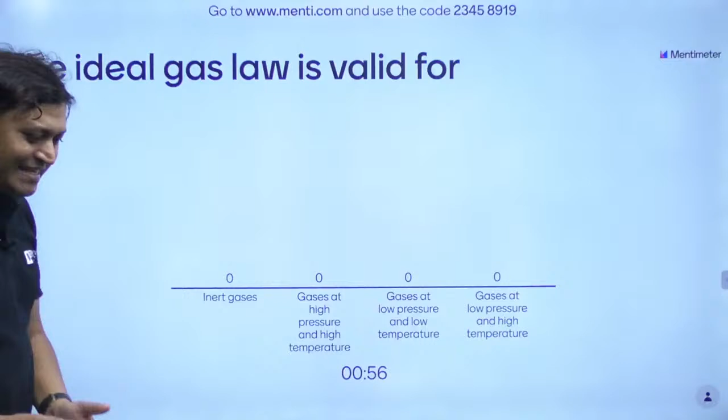60 seconds I had given you. The ideal gas law is valid for, there are 4 options on the screen below. Option A, inert gases. Option B, gases at high pressure and high temperature. Gases at low pressure and low temperature. And gases at low pressure and high temperature. Yes, quickly, 30 seconds you are having.

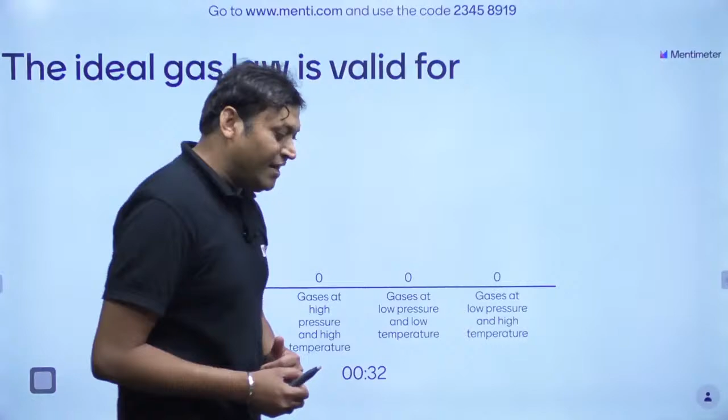It is going to be a very important as well as very interesting session for all of you. So please take part in the session. Yes.

20 more seconds to go. The ideal gas law is valid for. Your time is about to end. Time is up. So let us see how many of you have participated and how many of you have given the correct answer.

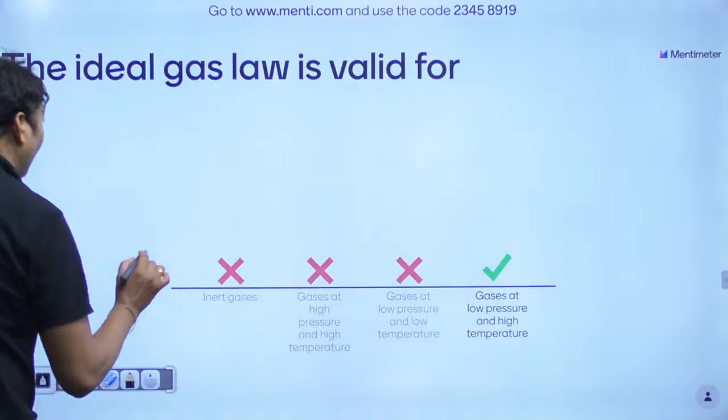The first question, the ideal gas law. If we talk about the ideal gas law, what is the ideal gas law? Ideal gas law is PV is equal to nRT. That is the ideal gas equation. PV is equal to nRT is the ideal gas equation. And this equation is valid for the gases where the molecular size and intermolecular forces of attraction become insignificant. That is at low density. The gases at low density behave as an ideal gas.

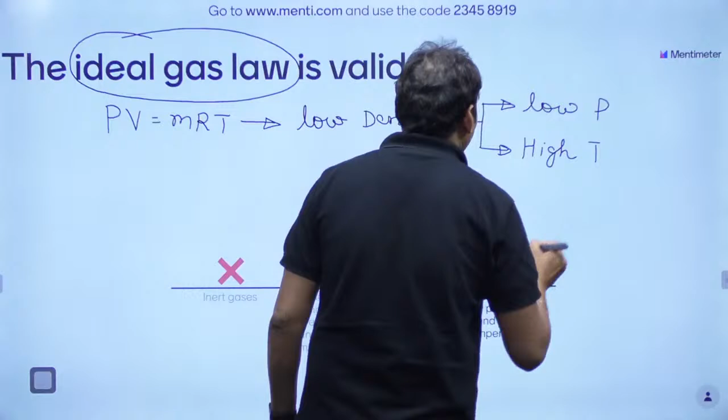And when the density of the gas is very low, it means the molecular size will become insignificant as well as the molecules are away from each other. So the intermolecular forces become insignificant. So at low pressure and at high temperature. At high temperature, the density is low as well as at low pressure, the density is low. So option D is the correct answer.

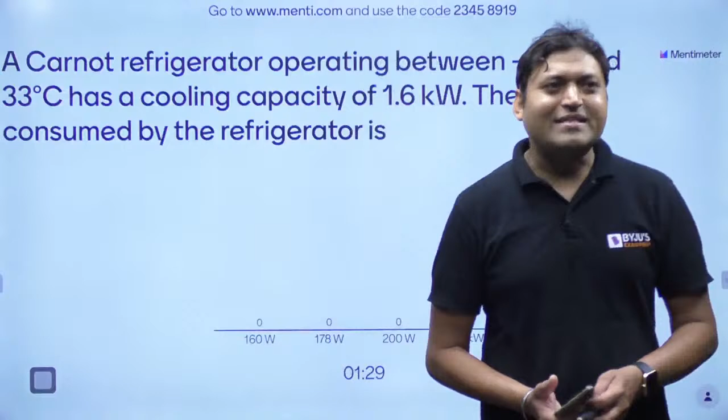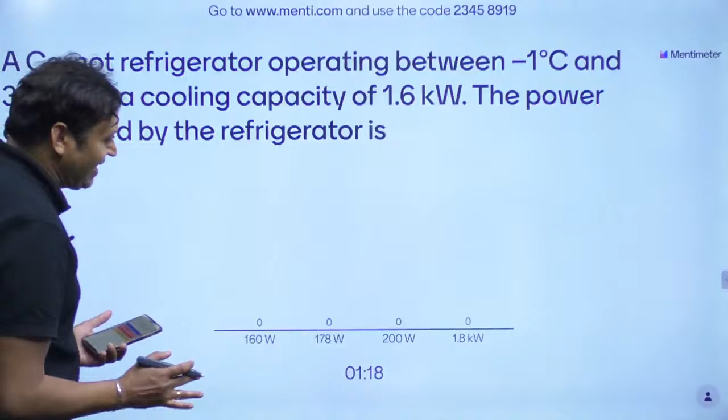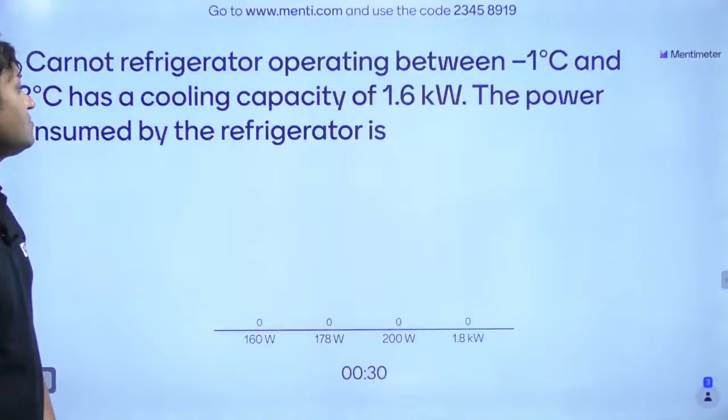A Carnot refrigerator operating between -1 degree Celsius and 33 degrees Celsius has a cooling capacity of 1.6 kilowatt. The power consumed by the refrigerator is? Very simple question. We have already discussed the refrigerator, how it works. So quickly select your answer. Thirty seconds are still there to select your option. Keep your notebook and calculator handy. You might require a calculator. 15 more seconds to go.

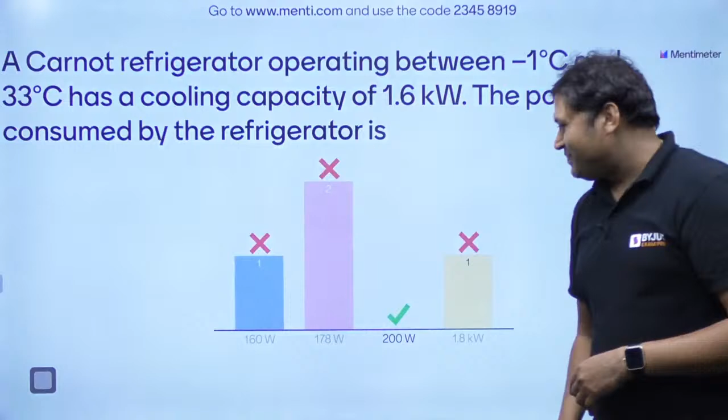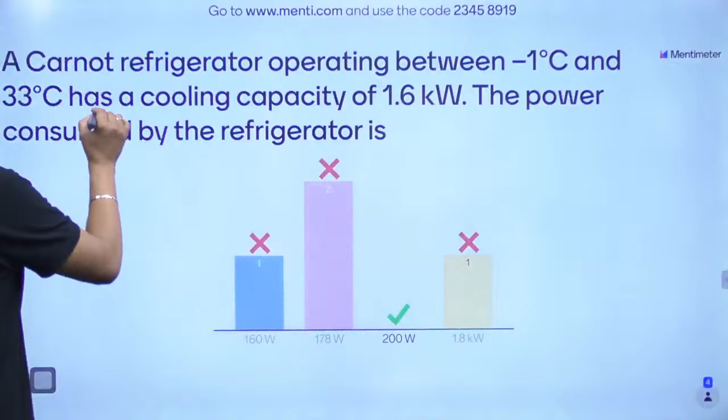Your time is up. Oh my God. Nobody had given the correct answer. The correct answer was option C, that is 200 watt. Look, it is a Carnot refrigerator. It means a reversible refrigerator. Operating between -1 degree Celsius, that is the source temperature. Then there is a refrigerator, and this is Q1, and this is 33 degrees Celsius. It is a work consuming device.

So this is Q2. Now, the refrigerator operating between -1 and 33 degrees Celsius has a cooling capacity of 1.6 kilowatt. Do you agree Q2 is given as 1.6 kilowatt? The power consumed by the refrigerator, W, needs to be calculated.

Now, can we say COP for reversible refrigerator? There are two formulas for COP. One is the desired effect. This is the desired effect. So Q2 by W, and that can be written in terms of temperature limits, that is T2 upon T1 minus T2, isn't it? This is T1, this is T2. From here we can find out the value of W.

Q2 is 1.6 divided by work consumed is equal to, what is T1? That is, sorry, T2. T2 is 272, isn't it? Upon T1 minus T2. Didn't I tell you that whenever we are talking about the temperature difference, then no need to convert it into Kelvin. So 33 minus -1, that will be 34, will be the temperature difference.

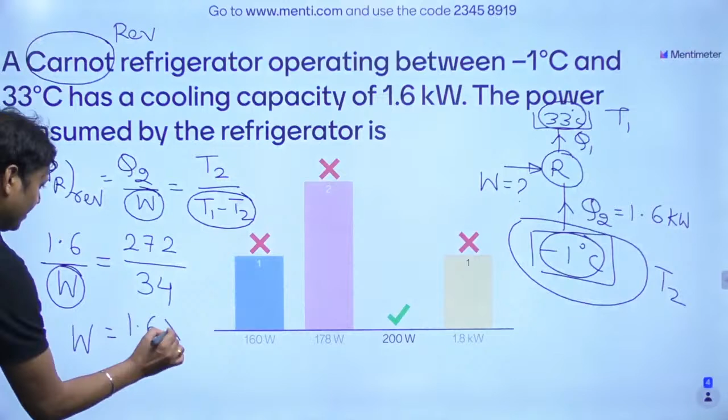Solve for W. W will be equal to 1.6 into 34 upon 272. That will be kilowatt. If you solve this, then you will get 0.2 kilowatt, isn't it? And 0.2 kilowatt is nothing but 200 watt. Option C is the right answer.

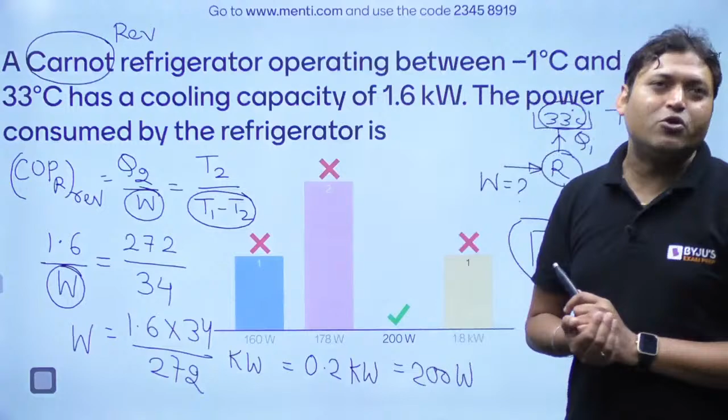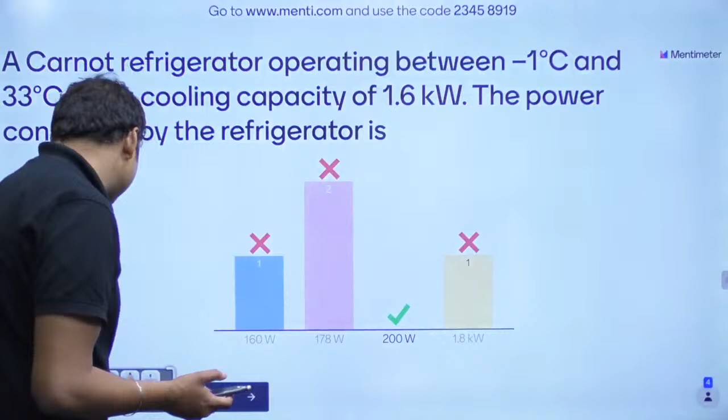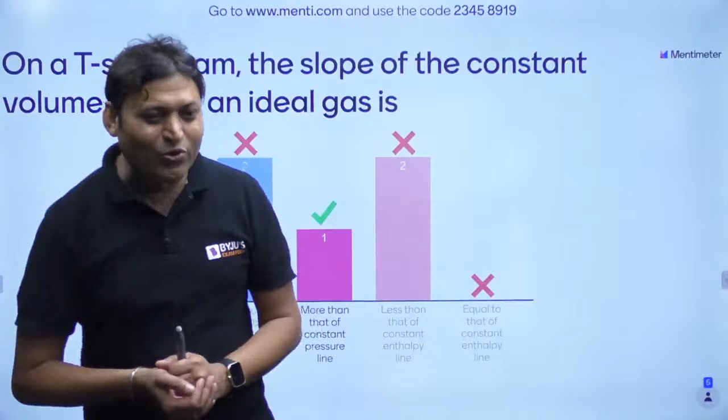Yes. I hope you know the answer. I have already discussed about constant volume, constant pressure lines on TS diagram. I have also talked about PV curve also. Five more seconds to go. Those who have not still selected, please select your answer. Only one student had got the right answer. You need to work hard to crack the GATE examination. That is the hint to you that you should prepare very well for your GATE 2023 examination.

The correct answer is, look, on TS diagram, the slope of constant volume, dT by ds for constant volume, is given by T by Cv. It is positive. On TS diagram, the slopes are positive. And the slope of constant pressure line is given by T by Cp. That is also positive. So if you know how to draw constant pressure line and constant volume line, these will be drawn like this. Like this.

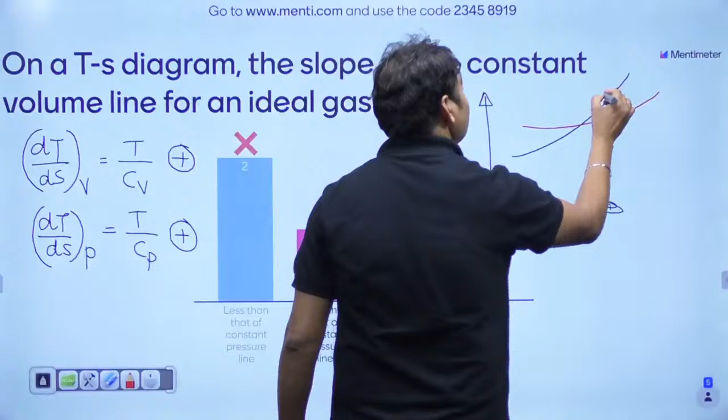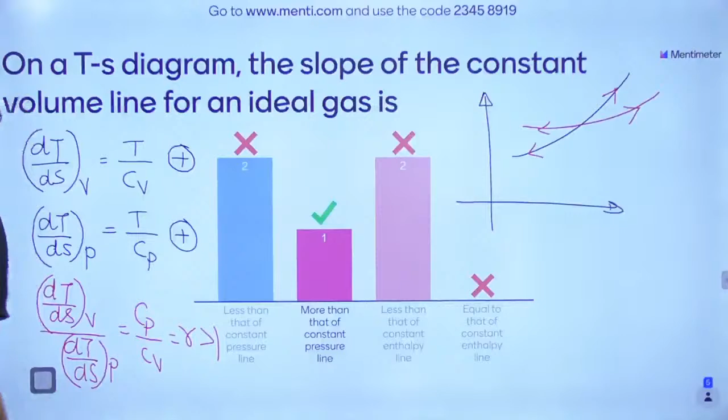So if you see, if you divide these two, dT by ds, slope of constant volume, divided by slope of constant pressure line, then it will be Cp by Cv, and that is gamma, which is greater than 1. So that is why the constant volume line will be having more slope compared to constant pressure line on TS diagram. I hope it is clear to everyone, isn't it? So the correct answer to the question is option B. And let us have the leaderboard.

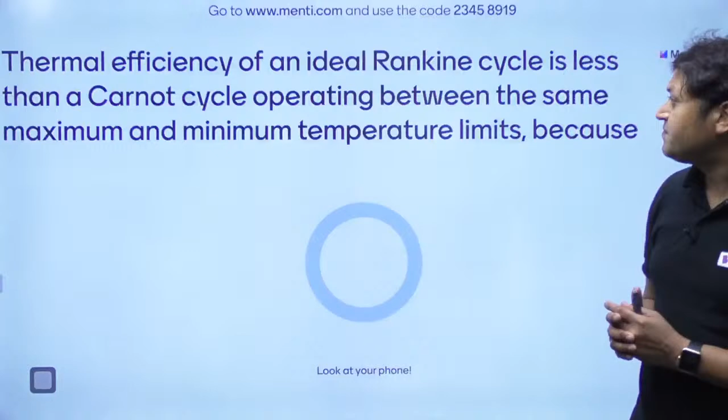The code is 23458919. The question is: the thermal efficiency of an ideal Rankine cycle is less than the Carnot cycle operating between the same maximum and minimum temperature limits. What is the reason behind that?

I have given you 1 minute to get the correct answer. Think about the Rankine cycle and Carnot cycle - why is the efficiency of Carnot more, and Rankine cycle having less efficiency? The options are given at the bottom of the screen.

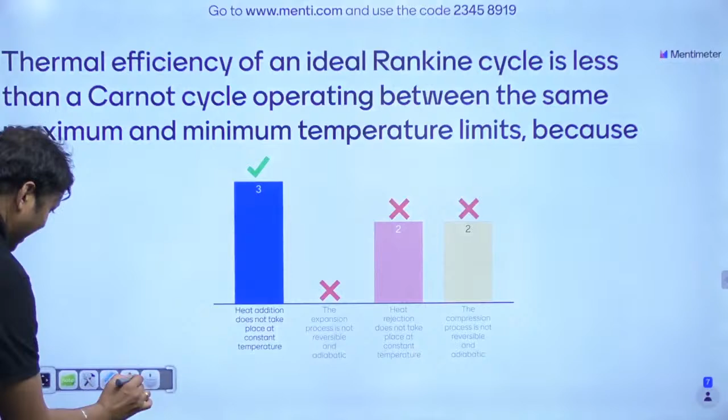Why is the thermal efficiency of ideal Rankine cycle less? If I show you Rankine and Carnot, there is a phase change. These cycles are vapor power cycles - the Rankine cycle is a vapor power cycle, and there is a phase change.

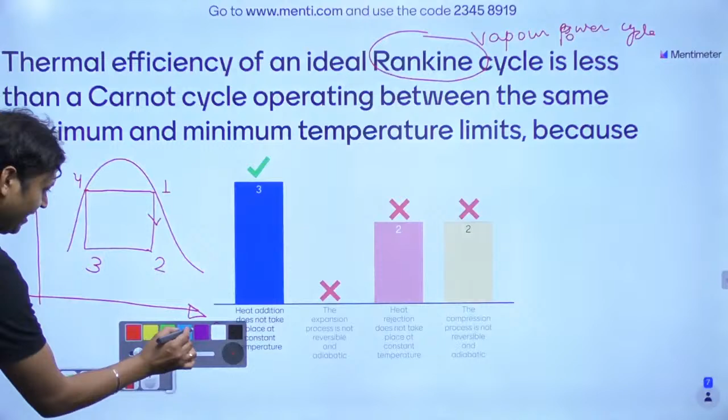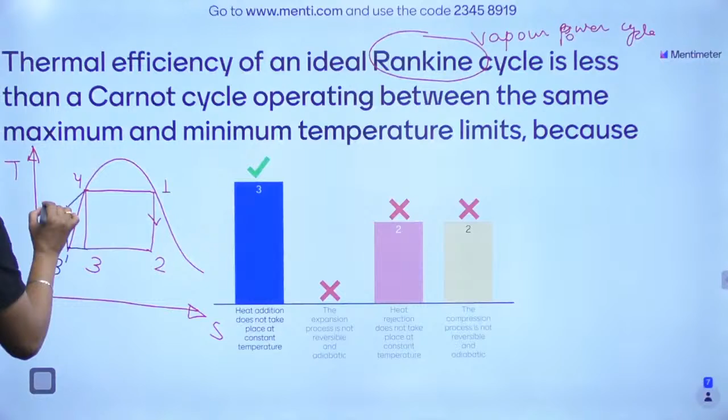On a TS diagram, if I draw both these cycles: point 1 is inlet to the turbine, then point 2, point 3, point 4 - 1,2,3,4 is the Carnot cycle. If I show you the Rankine cycle, it will be like this: 1, 2, 3 dash and 4 dash. So the heat addition happens up to the maximum temperature TH, same maximum, and this is the minimum temperature TL.

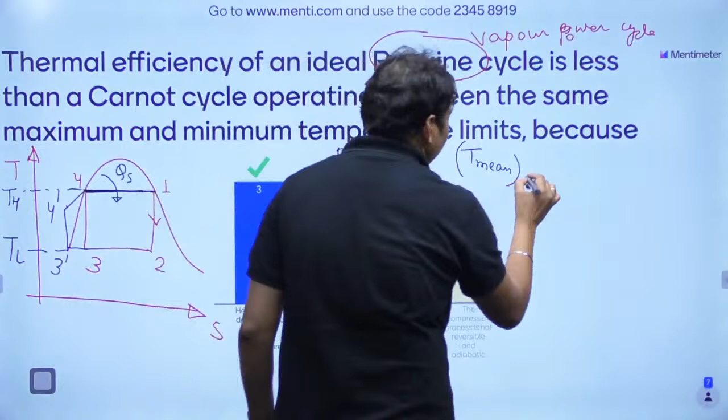Why does the Carnot cycle have more efficiency? Because the heat addition is taking place at constant temperature. So the mean temperature of heat addition in the Carnot cycle, which is TH, is greater than the mean temperature of heat addition in the Rankine cycle. In the Rankine cycle, the heat addition takes place between 4 dash and 1, so that has a lesser mean temperature. That is the reason the thermal efficiency of Carnot is more than the thermal efficiency of Rankine.

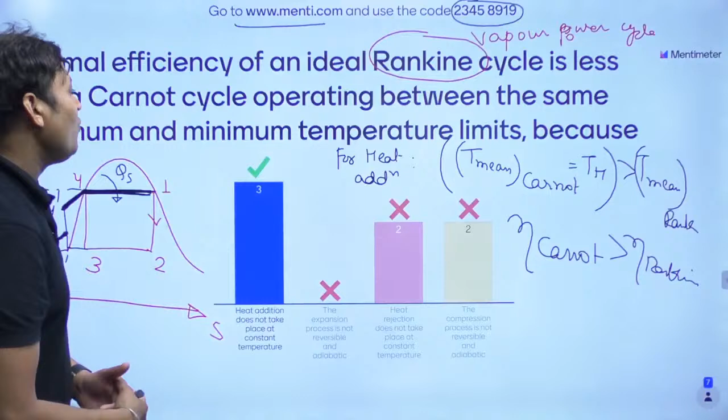So that is why heat addition does not take place at constant temperature in case of the Rankine cycle, and the mean temperature of heat addition will be lesser in case of Rankine cycle, and that is why the thermal efficiency is less. I hope it is clear.

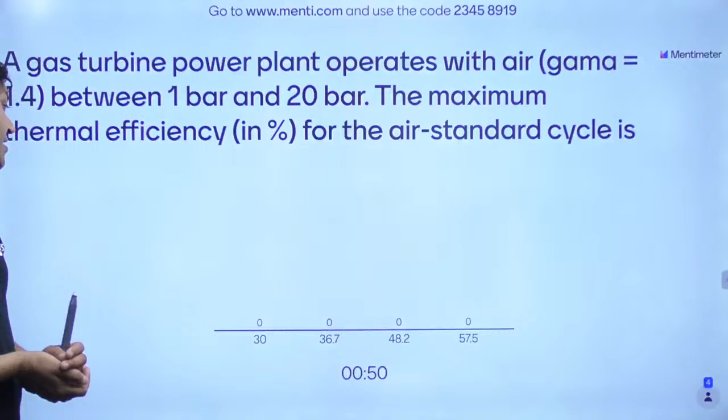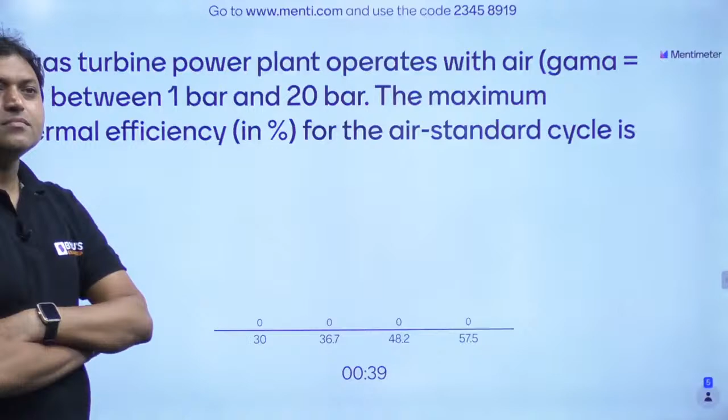Waiting for your response. Quickly solve it using the calculator and get your answer. Thirty more seconds to go.

Air can be treated as an ideal gas. Which cycle is the gas turbine power plant using?

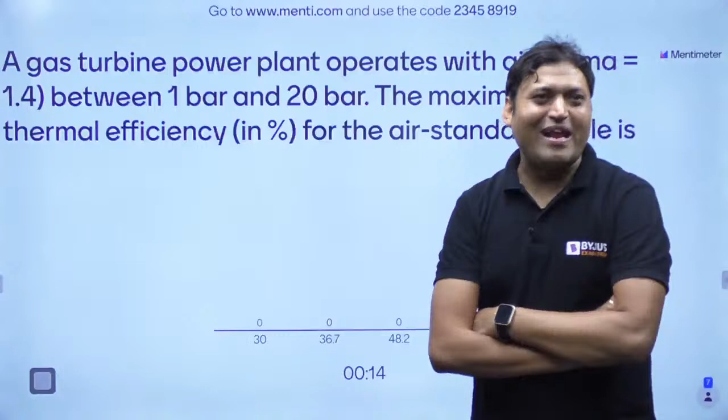I hope you are busy with calculations and manage to get your answer. Select your answer before the time ends. 5 more seconds to go. Select your answer quickly. Time is up. Oh my God.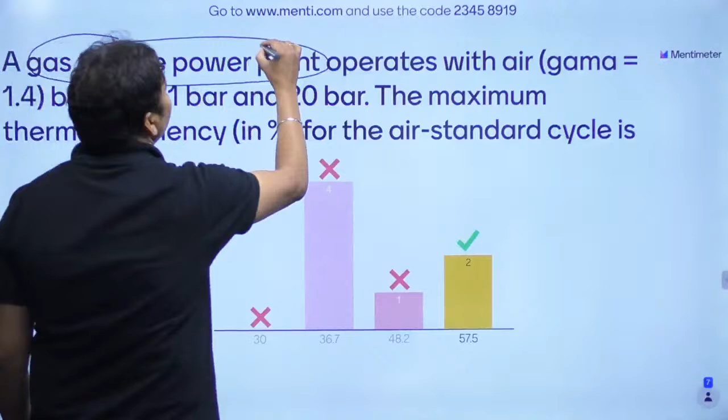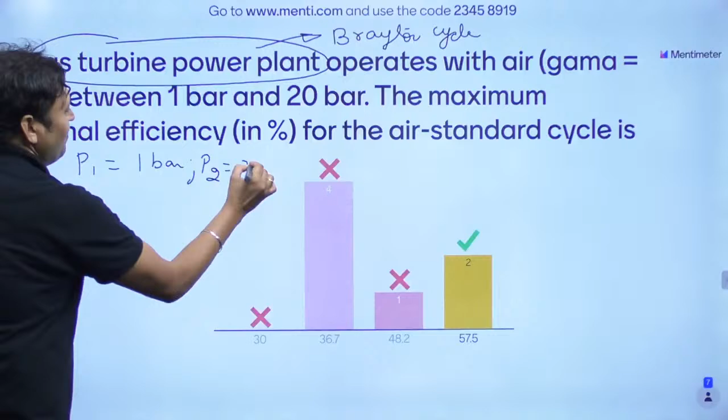Not the great one. A gas turbine power plant is using the Brayton cycle, a constant pressure cycle. The heat addition and heat rejection are constant pressure processes, and P1 is equal to 1 bar, whereas P2 is equal to 20 bar. So we can say pressure ratio Rp is P2 by P1, that is equal to 20.

What is the thermal efficiency of the Brayton cycle? That is equal to 1 minus 1 upon Rp to the power gamma minus 1 by gamma. Everything is given: 1 minus 1 upon 20 to the power gamma minus 1, where gamma is 1.4, so 1.4 minus 1 is 0.4, divided by 1.4. Do the calculation and you will get the answer: 57.5 is the correct answer.

Yes, good, Brayton cycle for the gas power plant. Thermal efficiency equals 1 minus 1 upon T2 by T1, if you remember, and T2 by T1 is Rp to the power gamma minus 1 by gamma.

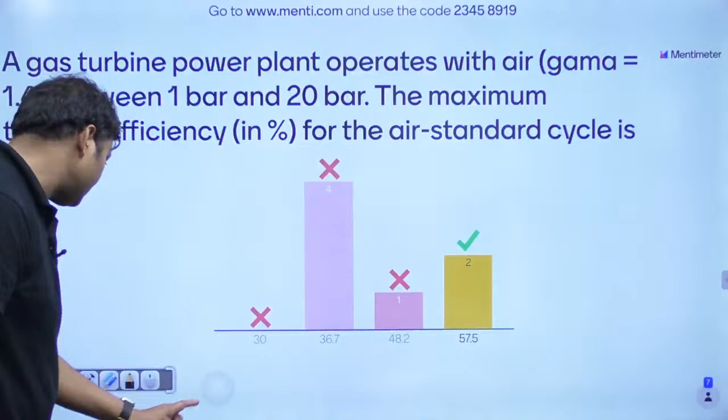Let us have the leaderboard. KK was the fastest this time.

But still, Nora Fateh is the topper. Are you guys enjoying? Let us move to the next question.

20 more seconds to go. Your time is up. Oh my God, great, great.

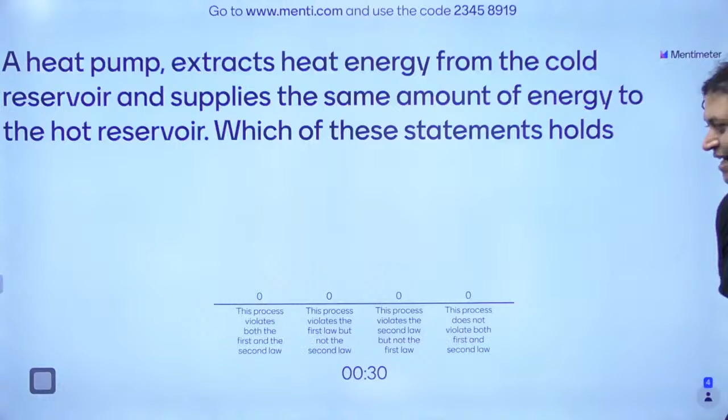You need to select the correct answer as per your understanding. The first option is this process violates both the first and second law. Option B is violates first law but does not violate the second law. Option C is violates the second law but does not violate the first one. Option D is neither violates first nor violates second law of thermodynamics.

20 more seconds to go. We had already discussed about that. So those who are not able to recollect the concept, do revise again and again the same concept. Keep on revising again and again so that you will be able to recall the concept within the limited time frame. Your time is up.

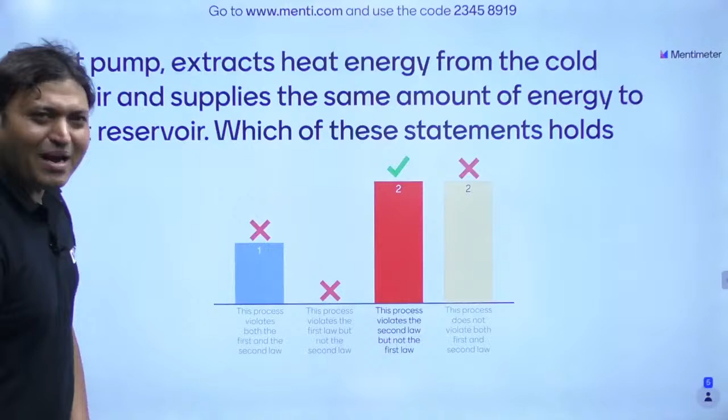Now, if we see, look, a heat pump. What is a heat pump? It extracts the energy or heat from low temperature reservoir. Let us say this is Q2 and giving to the high temperature reservoir. This is heat pump. It is a work consuming cyclic device, anti-clockwise cycle.

So the question says if Q2 is equal to Q1, the heat pump extracts heat energy from the cold reservoir. This is the cold one and this is the hot one. So Q2 is equal to Q1.

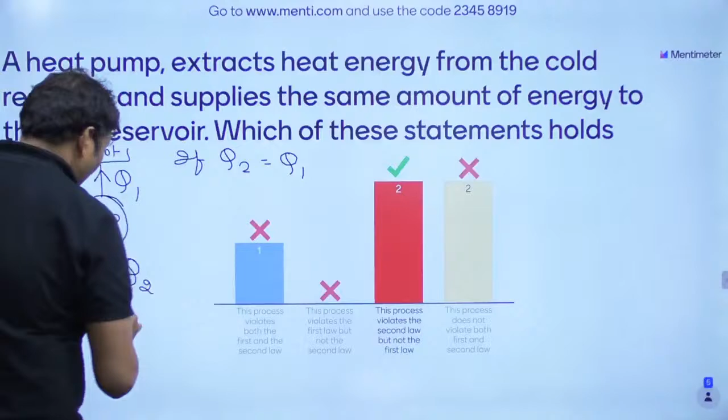Then what about if we see the first law of thermodynamics for the system? So Q2 is equal to Q1. It means the first law is not getting violated. The energy in is equal to energy out. So W will be equal to 0 in that case. So it is not violating the first law, but yes, definitely it is violating the second law.

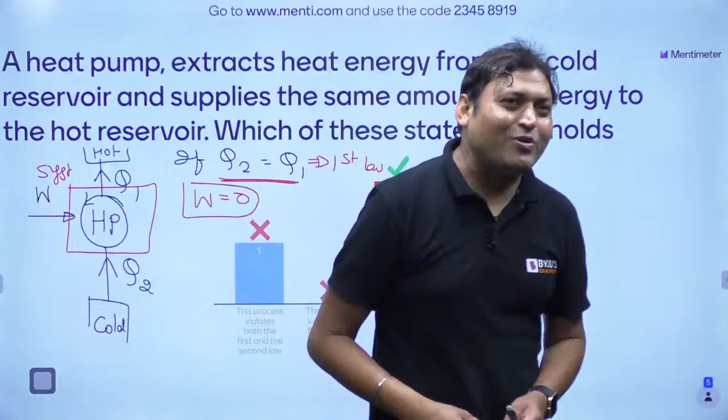Which second law? The Clausius statement of second law of thermodynamics. What is the Clausius statement of second law of thermodynamics? So that is also you need to take care, Nora Fateh. The second law of thermodynamics, or the Clausius statement, says that it is impossible to develop a cyclic device in which heat flows from low temperature to high temperature reservoir without any external work.

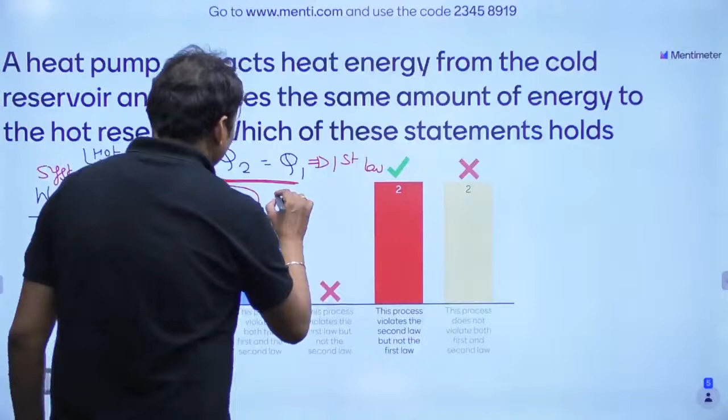We need to provide an external work if we want the heat to flow from the cold reservoir to the hot reservoir. So that is violating the second law, or more specifically the Clausius statement of second law of thermodynamics.

All right, let us have the leaderboard now. Good. KK is the fastest one. Yes, KK, keep it up. You can become the topper.

So let us move to the next one. Question number 8. Without wasting much time, let me present you the question number 8.

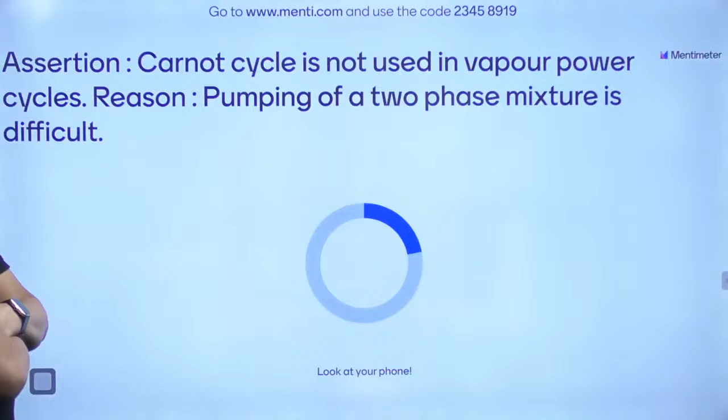The Carnot cycle is not used in vapor power cycles. What is the reason? Assertion is Carnot cycle is not used in vapor power cycle. The reason is pumping of a two-phase mixture is difficult.

40 seconds to select. If both assertion and reason are correct and the reason is the correct explanation for assertion, option A. If assertion is correct and the reason is also true but the reason is not the correct explanation, option B. If assertion is correct and the reason is false, option C. And assertion and reason both are false, option D.

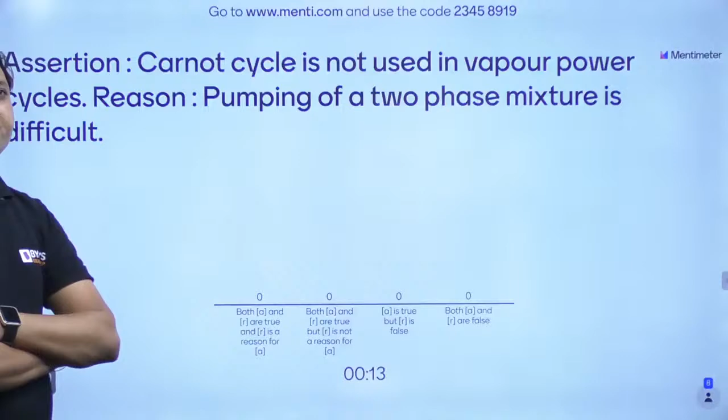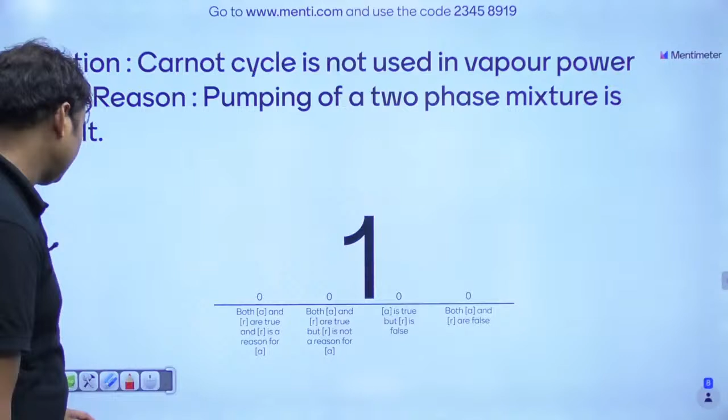20 more seconds to go. Ten seconds to get your answer, assertion and reason. Your time is up.

Option A is actually the correct answer. Look how, if we draw the Carnot cycle on TS curve, this is how the Carnot cycle will be drawn: 1, 2, 3, 4. The problem with the Carnot cycle is point 3 is in wet region.

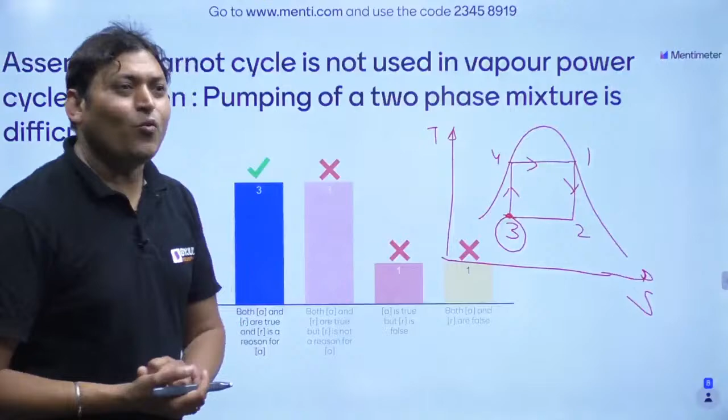It is a mixture of liquid and vapor, or water and vapor. Point 3 is in wet region, which is a mixture. So it is very difficult to design a compressor which can handle or deal with the liquid and vapor mixture. And that is the reason Carnot cycle is not used in vapor power plants.

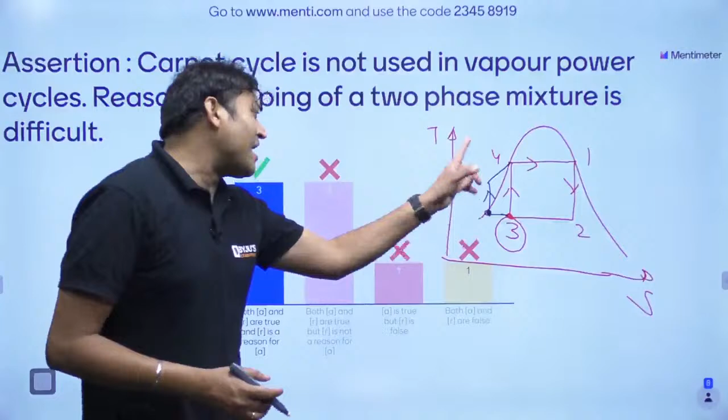Which cycle is used? It is the Rankine cycle which is used, where the pump is used to compress or for the pumping of water, and then heat addition will convert water into vapor. That is why the Carnot cycle is not preferred and the Rankine cycle is used in vapor power plant or vapor power cycle.

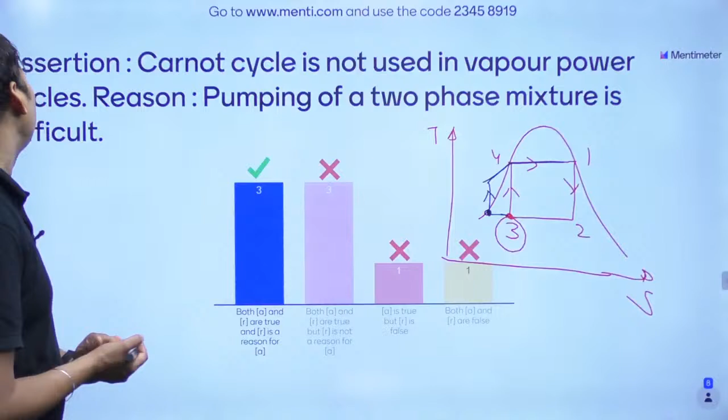Right? So let us have the leaderboard.

Who was the fastest? Nora Fateh. Great. Let us move to the next one. Question number 9. Let us move to the question number 9. Yes. Are you guys enjoying?

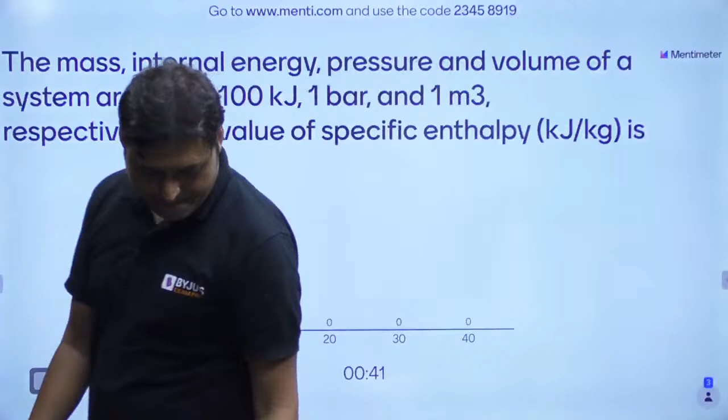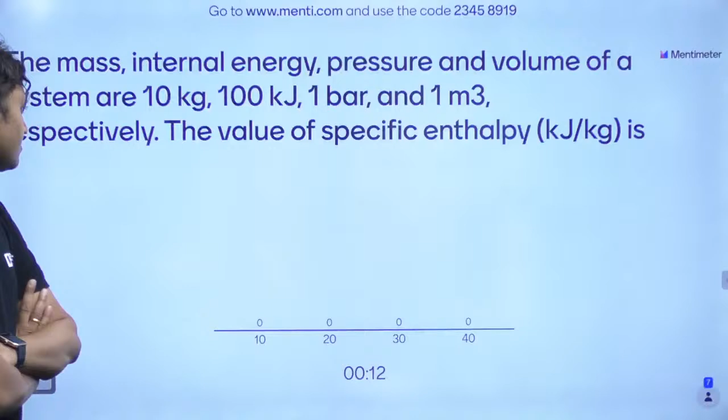The mass, internal energy, pressure and volume of a system are given 10 kg, 100 kilojoule, 1 bar and 1 meter cube. The value of specific enthalpy is? Select your answer. Thirty more seconds to go. Write all the given parameters in your notebook and then find out the specific enthalpy, that is intensive property. Fifteen more seconds. 3, 2, 1, and time is up.

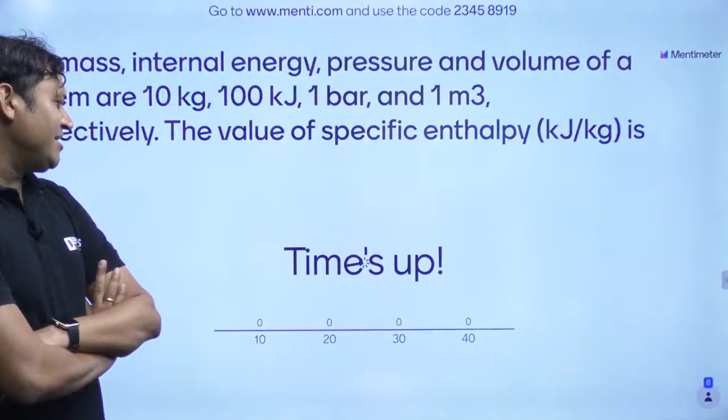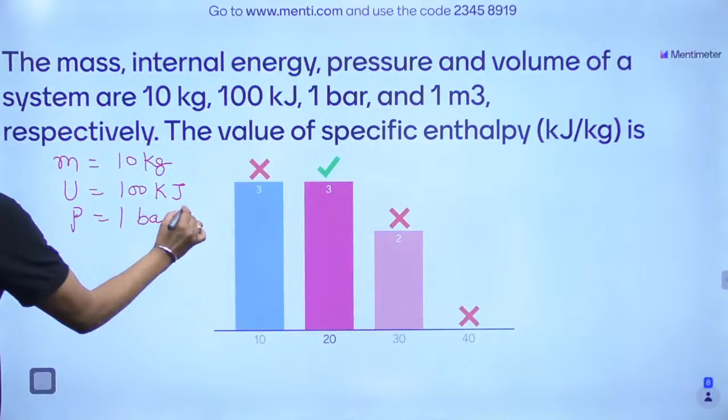20 kilojoule per kg will be the correct answer. Look, what are the parameters given? Mass is given as 10 kg. Internal energy 100 kilojoule. Pressure 1 bar, 1 bar is 100 kilopascal, and volume is 1 meter cube. The question is to find out the specific enthalpy. Enthalpy is actually a combination property. It is internal energy plus flow energy, U plus PV. So find out the total enthalpy, that is extensive property.

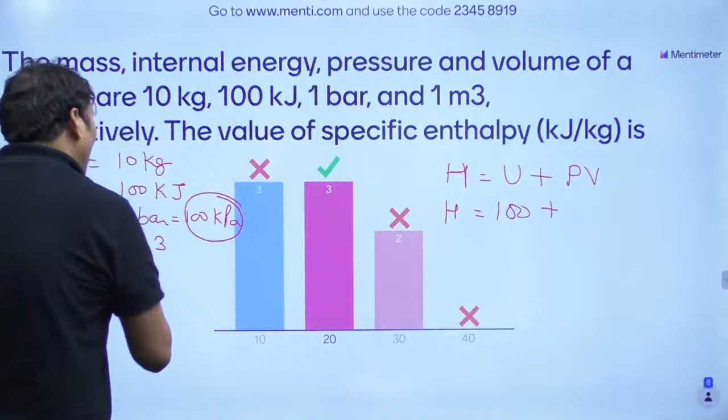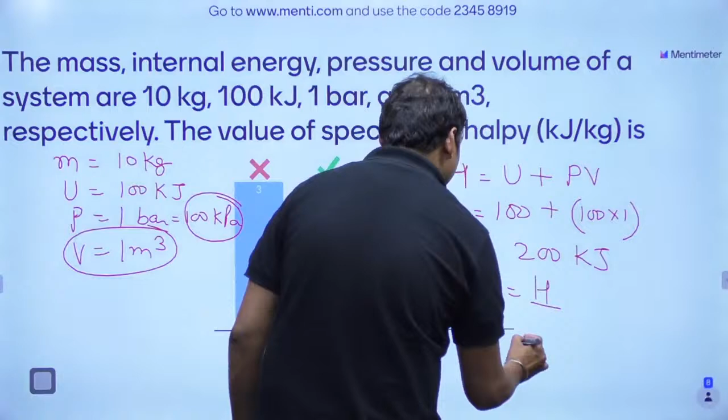U is 100 kilojoule plus pressure you should take in kilopascal and volume in meter cube, then it will give you kilojoule. 100 into 1. So the total enthalpy is 200 kilojoule, but the question is about small h, specific enthalpy per unit mass, that is 200 divided by 10. That is 20 kilojoule per kg. Option B is the correct answer.

Let us have the leaderboard now. Good. All right. You can check your score and let us move to the next question. 11th question, second last question for the day.

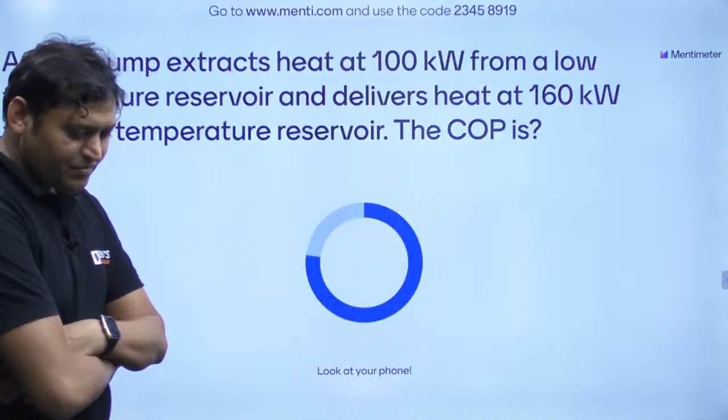Again numerical from the heat pump. The question is to find out COP. A heat pump extracts heat at 100 kilowatt from a low temperature reservoir and delivers heat at 160 kilowatt to a high temperature reservoir. What will be the COP? Very simple, yet beautiful.

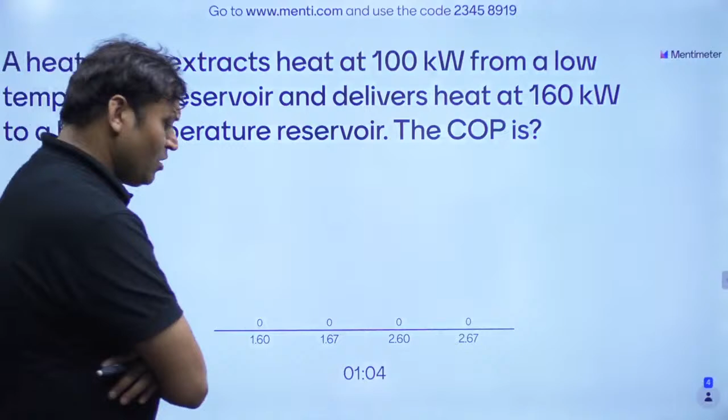Given you 1.5 minutes, do your calculation. I want everyone to get the correct answer. For this question at least, I want everyone to get the correct one.

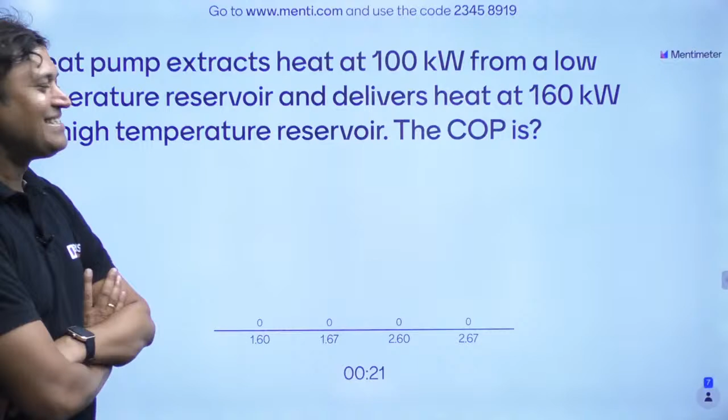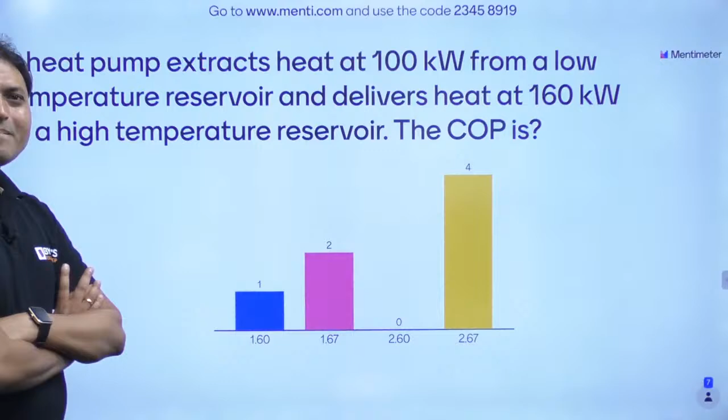20 more seconds to go. There are actually options A, B, C and D. These are 4 options. You have to select your option as per your calculation. Your time is up. D is the right answer. Still people are there who could not get the correct answer.

See, if we talk about the heat pump, desired effect is Q1. This is Q2 and this is work. There is a difference between heat pump and refrigerator. Heat pump extracts heat at 100 kilowatt, Q2 that is equal to 100 kilowatt, from a low temperature reservoir. This is the low temperature reservoir, cold reservoir. This is the hot reservoir. And delivers heat at 160 kilowatt to a high temperature reservoir. This is 160 kilowatt, Q1 dot.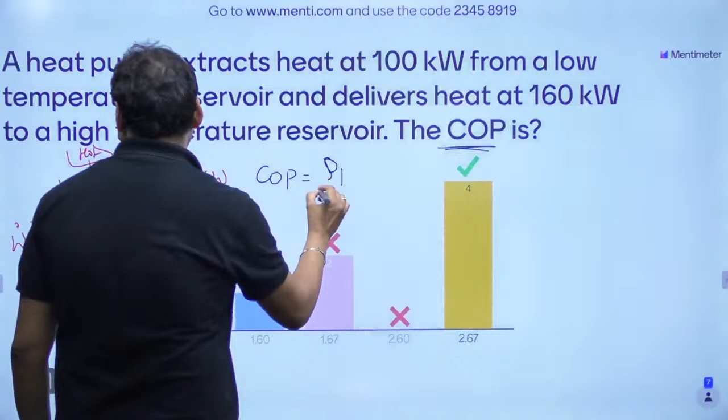We can find out W dot from the energy balance equation, first law of thermodynamics. W dot will come out to be 60 kilowatt, isn't it? And what is COP for the heat pump? Desired output, that is Q1 upon W dot. Q1 is 160 divided by 60. So it is 16 by 6 or 8 by 3. 8 by 3 will be the correct answer, 2.67. Let us have the leaderboard now.

And the last question for the day, I hope you have enjoyed it. Do revise the concept if you are not comfortable with the concept. Swagnik. Okay, who is he? Swagnik Chatterjee.

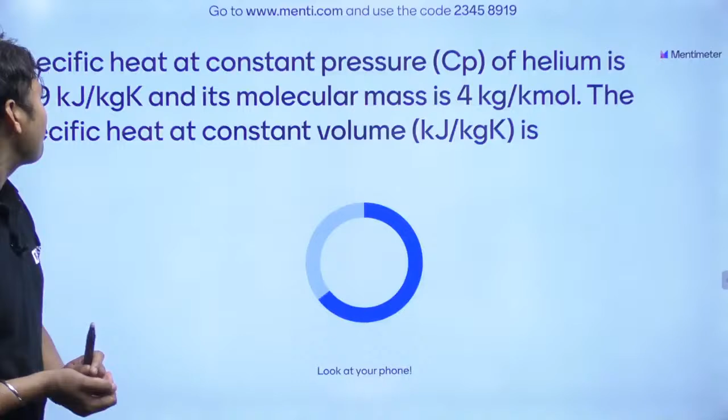So let us move to the last one and then we will end our session. I want everyone to get the correct answer for the last one. Get ready. For helium, specific heat at constant pressure is given. Molecular mass or molar mass is also given. The specific heat at constant volume will be how much? I want everyone to get the correct answer for the last time.

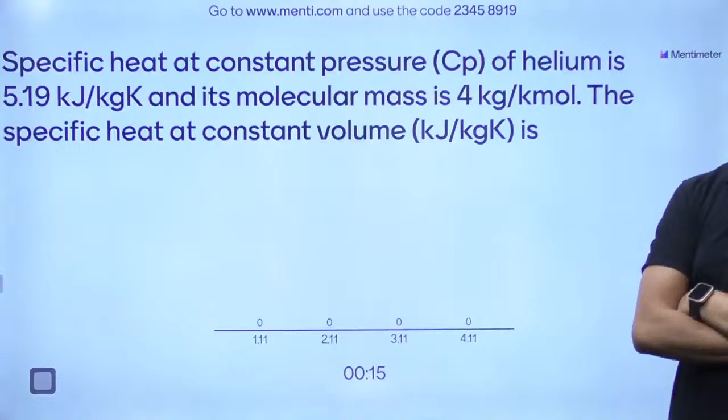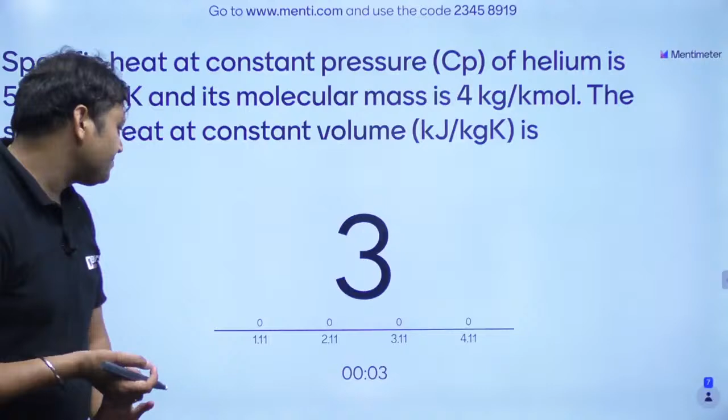Time is up. And oh my goodness, C will be the correct answer. Na, आया नहीं आपको. Do you know Cp minus Cv is equal to R? R is the specific gas constant which can be written as R bar by M. M is the molecular mass.

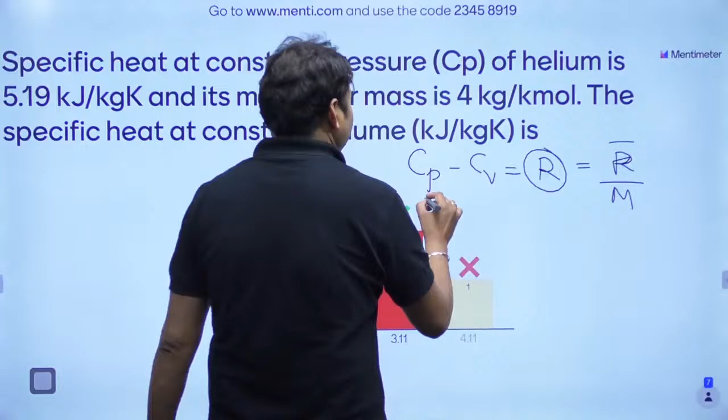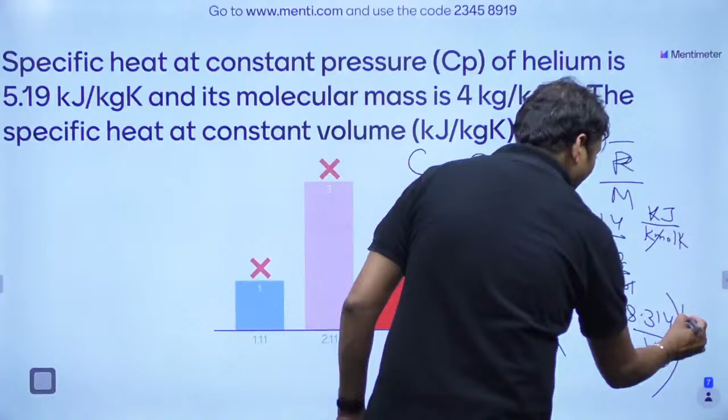Cp is given as 5.19, minus Cv is equal to R bar, 8.314 kilojoule per kilomole Kelvin, divided by 4 kilogram per kilomole. So this kilomole gets cancelled out. So Cv is equal to 5.19 minus 8.314 divided by 4. That will give you the answer in kilojoule per kg Kelvin, isn't it? So that will give you 3.11.

Let us have the final leaderboard and the one who had got the fastest correct answer. Who was the fastest one this time?

So that is all for the session. I hope you guys have enjoyed it and you have learned to improve your speed. If you are not able to get the right answer within the limited time frame, we will keep on having these types of sessions to improve your understanding about the subject and make you comfortable with your preparation. We are here to help you out.

Hi, Sagnik. Yes, Sagnik had given the fastest answer for this question. So that is all. Nora Fateh, well done. Congratulations.

Those who are not satisfied with their performance, try to improve your performance by revising the concept again and again and by solving more and more numericals on your own.